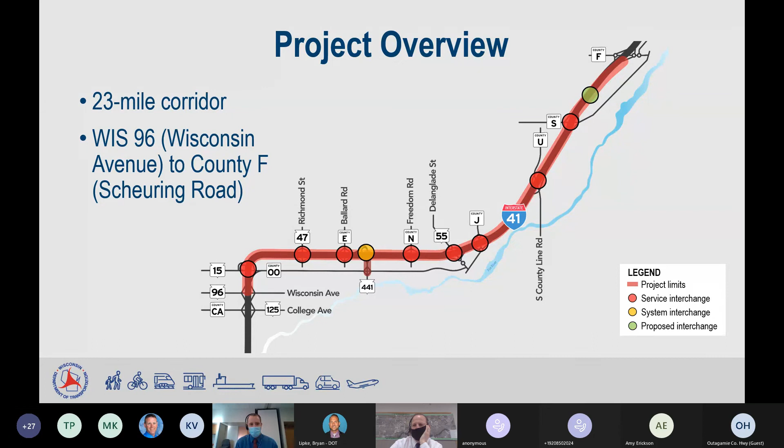The purpose and need for our project is to provide a safe, reliable highway that meets interstate standards and addresses existing safety and operational deficiencies. We also plan to address the outdated Wrightstown Safety and Weight Enforcement Facility, or SWEF, to allow it to operate effectively with our proposed improvements to I-41.

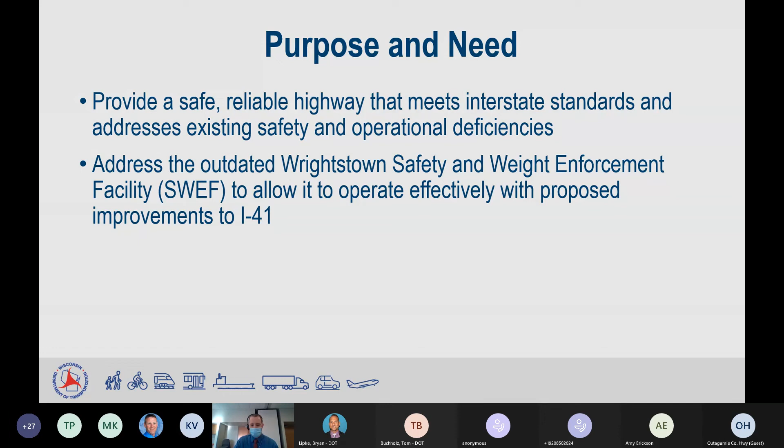A number of build alternatives that we've considered as we've gone through this process: one is a 4-lane modernization of the roadway, basically reconstructing with the similar lane configuration out there today, with the addition of looking also at hard shoulder running for having traffic move on the shoulders during peak times. There's also a 6-lane modernization, or an expansion of the number of lanes on the highway. We're looking at specific alternatives for the interchanges, and specifically what we're going to be talking about today are the alternatives for the Highway 47 interchange.

We're looking at overpass improvements. We have a number of bridges that go over the highway, and a number of those will conflict with any improvements to the mainline highway or construction of the highway. A lot of them are also older, so we'll be replacing a number of those and improving them.

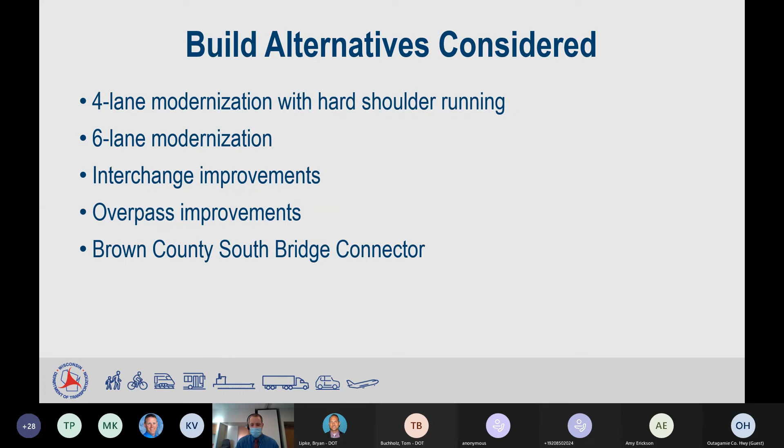We'll also be constructing a segment of Brown County South Bridge Connector with this project. DOT has committed to constructing a new interchange with I-41 after they've completed their EIS process, which they have. So we will be moving forward with a new interchange with I-41 as part of this project.

Other project elements under consideration are combining the safety and weight enforcement facility and a new Northeast Region State Patrol post. The current post down in Fond du Lac is aging and nearing the end of its service life, so we're considering co-locating those facilities.

We're looking at a new salt shed facility at Outagamie County's Department of Public Works area. We're also looking to address pavement needs at three existing park and ride lots along the corridor at County E, County N, and County S.

We're also looking at proposed bike and pedestrian accommodations on the crossroads that either go under or over I-41, working with the communities to make sure that any bridges or underpass areas are going to meet long-term plans for the communities.

We're currently in the midst of our alternative screening process. We're assessing alternatives' effectiveness, their environmental impacts, their real estate needs, and their construction costs. We're looking to gather input on alternatives from the public, from tribes, from local governments, and other resource agencies.

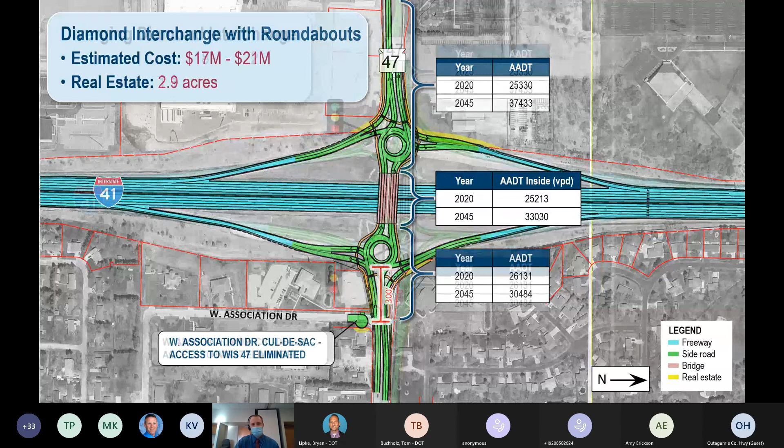In terms of operations, all three of these alternatives would function. We are seeing right now that the diverging diamond would probably give us the best long-term operational benefits. There are some additional safety benefits to the diverging diamond over both the roundabout alternative in terms of pedestrian safety, and then with the standard signalized diamond in terms of minimizing or lessening the number of conflict points with those interchanges. So there are some considerable benefits to the diverging diamond. We haven't made any preferred alternative decisions yet, but they are strongly under consideration here.

Project schedule overall, again, we're in the middle of our environmental process. We expect this to continue through the end of 2021. Similarly with our agency coordination, which really will continue through the life of the project. Our traffic analysis is largely wrapped up at this point; certainly when questions come up, we dig into them and see if we need to gather more information, but it is largely complete.

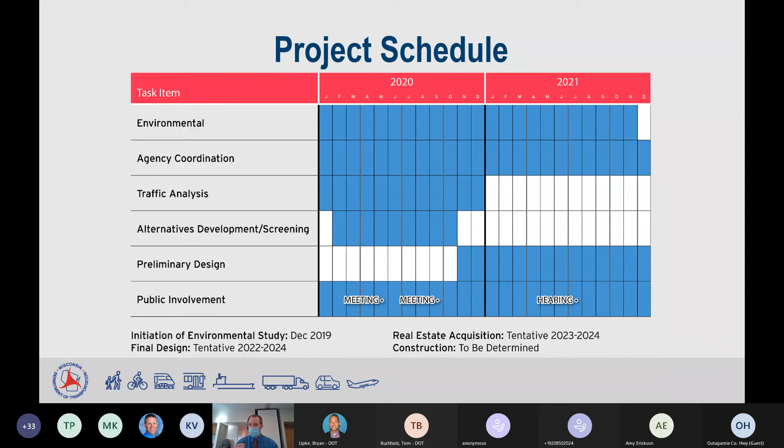We're still working through our alternatives development. We're kind of towards the end of our screening process, where we're assessing those impacts of all the alternatives, starting to figure out exactly which way we're going to be going. And then we're going to be moving soon into our preliminary design process, getting the pen on the paper a little bit more clearly, so we can really nail down those impacts. And then our public involvement process will certainly be continuing throughout the life of this process.

Some key milestones: we got our approved project initiation letter through Federal Highway Administration last January of 2020. We've had some virtual local officials meetings and virtual public involvement meetings back in the spring last year, and then in the fall last year, where again the alternatives that I described today we presented to the public for the first time.

Some of our next steps include completing that environmental assessment, which we anticipate doing by this June. And then we'll be going out to a public hearing that we anticipate to be in July of this year, with our final environmental approval anticipated for November of 2021. At that point, we would be moving into our final engineering, which tentatively would be 2022 through 24. And then our right-of-way acquisition process, along with utility relocation and a lot of other coordination that has to take place, which will largely be 2023 through 2024 timeframe, with construction to be determined after that, until we really have that environmental document and process completed. We can't say exactly when we're going to be constructing things.

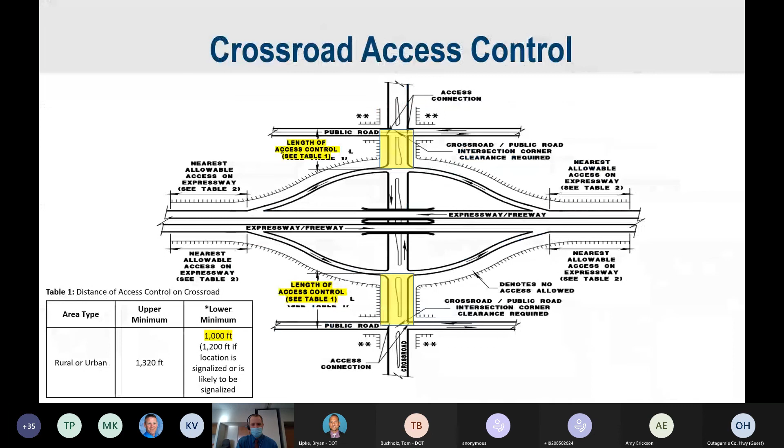Sure - wrong way here. So the primary safety benefit of the diverging diamond over the roundabout, and again none of these are unsafe designs, I want to stress that each of these alternatives would be, from DOT's perspective, a safe design. But some of the advantages we see of the diverging diamond over the roundabout in terms of safety primarily have to do with pedestrian safety.

We know that the city of Appleton in particular, and Grand Chute here, have a lot of pedestrians that travel along Highway 47 and Meade Street and Ballard, and we'd anticipate that will grow in the future. The pedestrian benefit to the diverging diamond is that most of those pedestrian crossings are signalized, so they're protected by that signal when they're crossing.

Whereas with the roundabouts, while we certainly think they're safe crossings, most of those roundabout crossings are still - you can't really signalize a roundabout and create that additional safety benefit for the pedestrian. So that is one of the primary safety advantages here.

The other thing I'll point out is we see this as a safety benefit over a traditional signalized intersection, because each of these intersections limits the number of movements you can make. Vehicles don't have that choice between going straight or turning left. A typical intersection has 32 potential conflict points, and because of the limited way vehicles can travel, that number of conflict points is reduced through the DDI compared to a traditional signalized intersection.

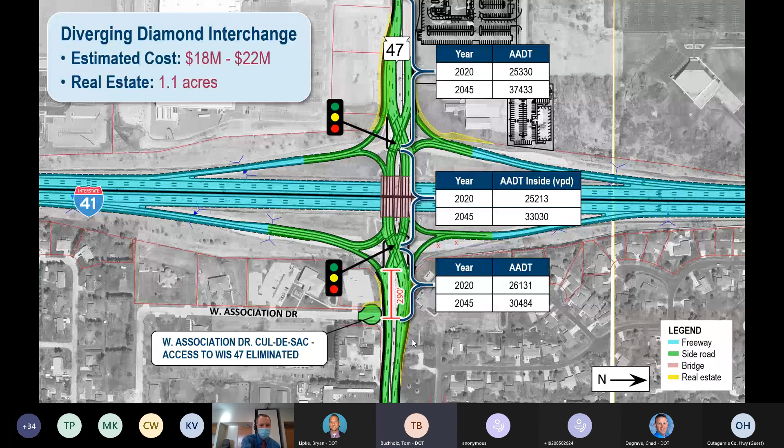Paula from the city asks about the city's thoughts on the bike-ped connection still being maintained for Association Drive. If there's currently a bike-ped connection that goes through there, we would likely maintain that. I'm thinking of a similar configuration where Oneida Street, US Highway 10, was already previously cul-de-saced at the 441 interchange - there's a cul-de-sac with a similar configuration. We actually even added an access there for pedestrians because we recognized that was a concern. So it's likely we would maintain any connections that are there today.